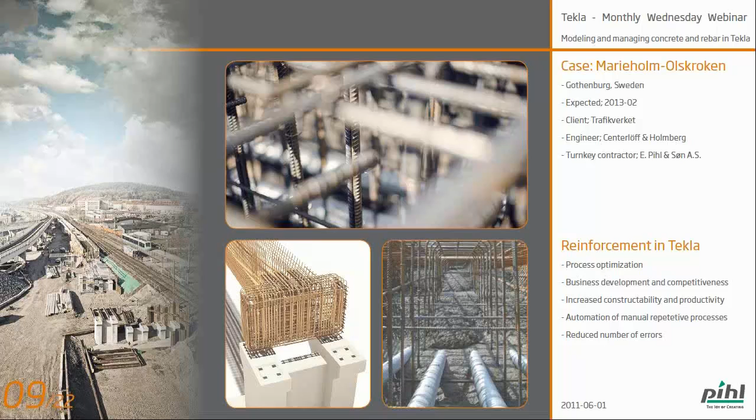So when we received the 2D drawings from the consultant, we started modeling all the concrete works and the reinforcement in Tekla. So as you see here, we have a lot of reinforcement, especially in the top of the column structure. It wasn't possible to add all the reinforcement that was described on the 2D drawing.

And for us as a contractor, it was very easy to show this to the external consultant and not get to a position on site where we couldn't assemble the reinforcement.

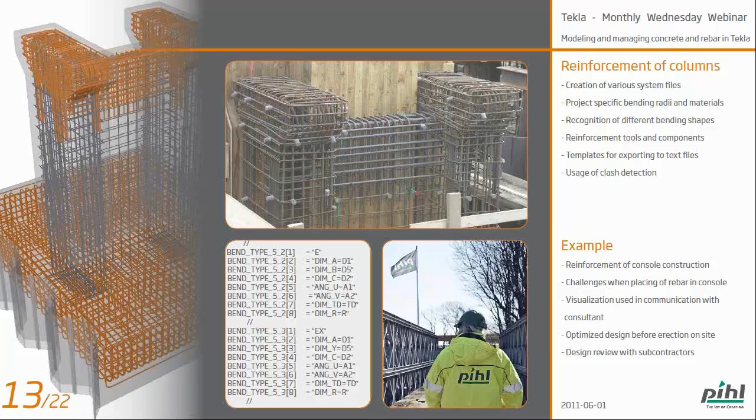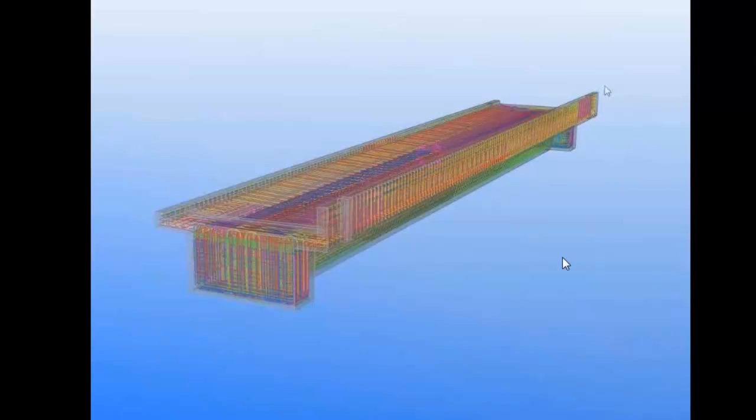Today we have a totally new way of ordering reinforcement on our projects. We simply do the reinforcement work in Tekla, as I have already mentioned. Then we do the clash checking and make sure that everything is solved before we actually do the order. Then we simply select the reinforcement, and then I say please export the selected rebars.

So as I mentioned earlier, it was also very important not only to use the technology in the design, planning and manufacturing phase, but also directly in the execution phase. This has been very powerful, and it's been much easier for people starting up new reinforcement work, and our productivity rates have been much better after the introduction of the technology.

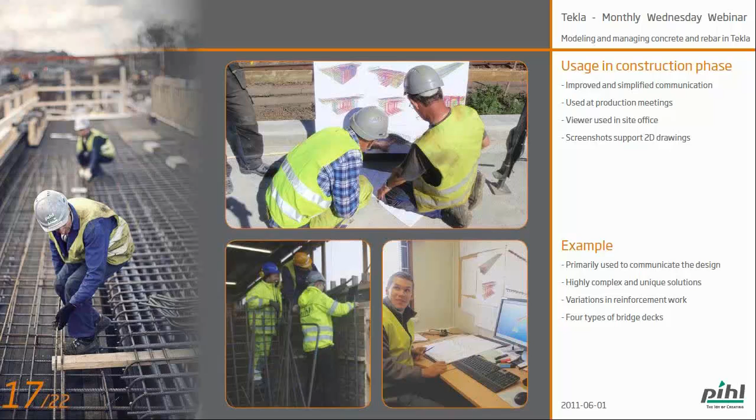Further on, our wasted reinforcement material is close to zero today, because these cut and bending lists are totally optimized. And further on, our productivity rates are achieved faster.